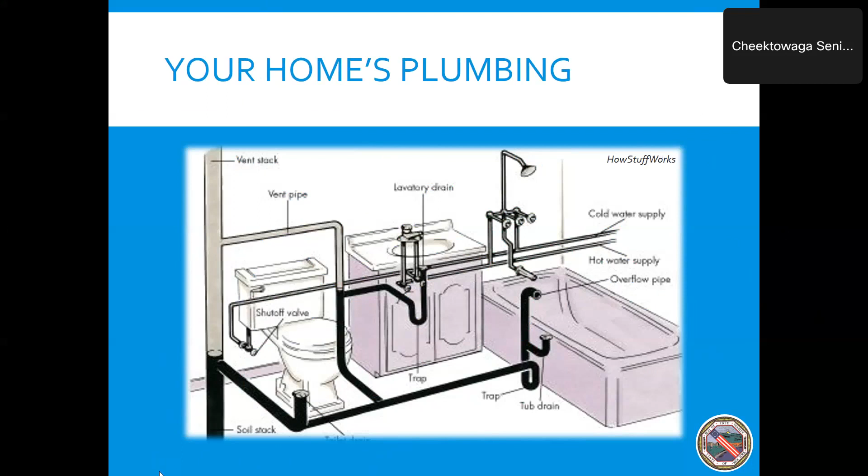So it comes on down, and it flows by gravity. And what I mean by gravity is if you take this table and put a marble on it, and it's flat, it's just going to stay in that one place, right? If you tilt it just slightly up, it starts rolling down the table, right? In a similar way, we have our pipes. They're sloped slightly downward, and what that does then, it allows the flow to go by gravity. So that's what we talk about, gravity flow.

So you have your indoor plumbing, and that comes down, and then it goes into what's referred to as your house or sewer lateral. Those smaller pipes come into a slightly larger pipe, usually about 4 or 6 inches in diameter.

What about the thing that goes around, that's for rain that comes in? Yeah, so there's 2 separate systems. You have your sanitary system, and then you have your storm system. They're not actually meant to be connected, except in the city of Buffalo, because they have a combined system. So this is just for the sanitary.

So then that private lateral connects to, in this area, a public sewer system. In some rural areas, they might have a septic tank instead. The lateral in most municipalities is not owned by the public, so Erie County doesn't own those laterals, because it doesn't serve the public, it only services one building. Folks often think it's part of the sewer system, but because it only serves one property, it's actually a private asset.

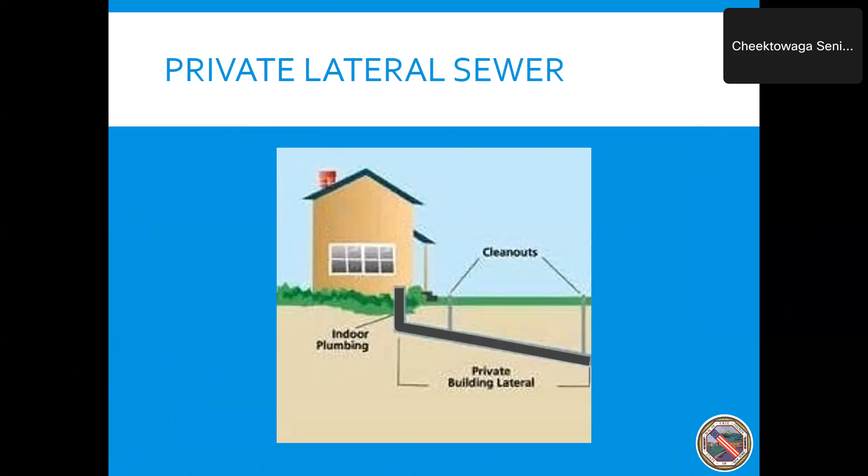So that's in today's world, but I want to take us back, oh gosh, probably like 170 years, 1854 in London. There was an infamous cholera epidemic that had gone throughout the entire city. It smelled terribly, and folks thought it was an airborne disease making people sick. It wasn't until Dr. John Snow meticulously went through the different records and mapped where people were getting sick, and then looked into where they were actually getting their drinking water from, that they figured out it was actually their water that was making them sick, not the air and stench going on around them.

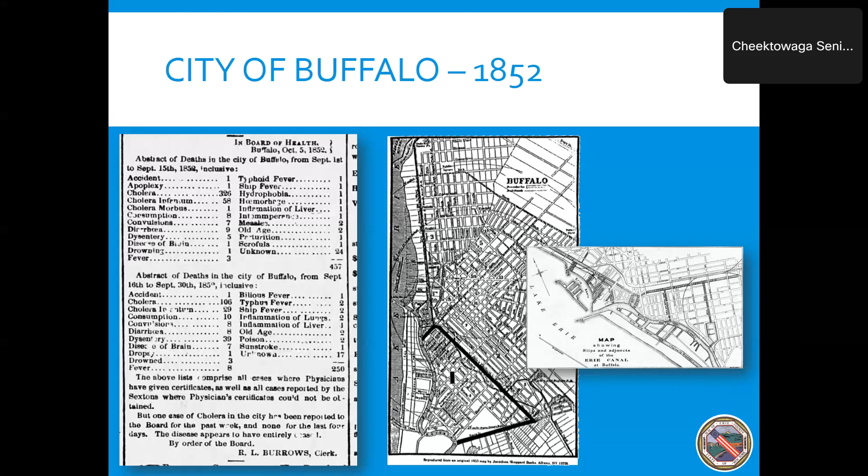Getting back to the private lateral, with advances in understanding the disease in the 1800s, they figured out that contaminated water from people's wastes was causing the drinking water to make people sick, so those wastes needed to be redirected away. Folks said, instead of getting them near where we draw our well water, let's put it into the river or stream, get it away from us. The common refrain was, dilution would be the solution to pollution. Let's get it out of there.

So oftentimes in the early days of sewers, that's exactly what happened. All the home laterals connected to a pipe, which went to a larger pipe, and then they just put it into the creek, the river, or the stream. As long as it wasn't near one of the drinking water sources, it was actually semi-effective. People stopped getting as sick because they weren't drawing contaminated water directly from a well right next to where they were putting their wastes.

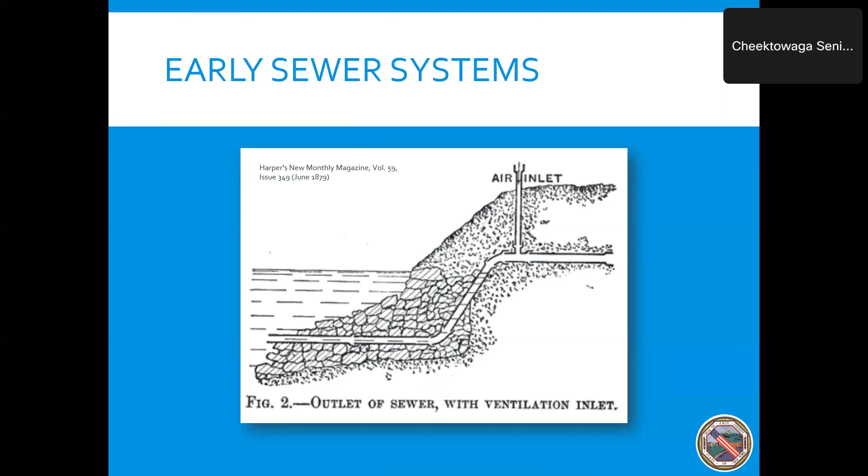But that solution of dilution is a catchy rhyme, it only could go so far. As populations started to grow, those wastes, while they may dilute at a certain concentration, as more and more people connected in and put it into the waterways, that created its own problems. To the point where, as populations grew, we were having all sorts of problems again, and waterborne disease was springing up.

To the point where, in the early 1900s, I think it was in Niagara Falls, which had the highest concentration, or the highest death toll for typhoid fever in the world. Think about it, that was last century. Like Niagara Falls, this wasn't a third world country. This was right down the river from us.

And the principal cause pointed to was the City of Buffalo. The city of Buffalo at the time was a top 10 population city, and you had so much waste going into the Niagara River, thinking it was going to be diluted, but meanwhile you were making people sick downstream in Niagara Falls.

So actually, the United States government and the Canadian government got together and put together an International Joint Commission to address this, because problems on the United States side were causing problems in Niagara Falls, Canada, and problems in Canada could cause problems in the United States. So we have these shared waters, we need to protect them. This body is still here today, looking at different issues that happen with water quality in the Great Lakes region.

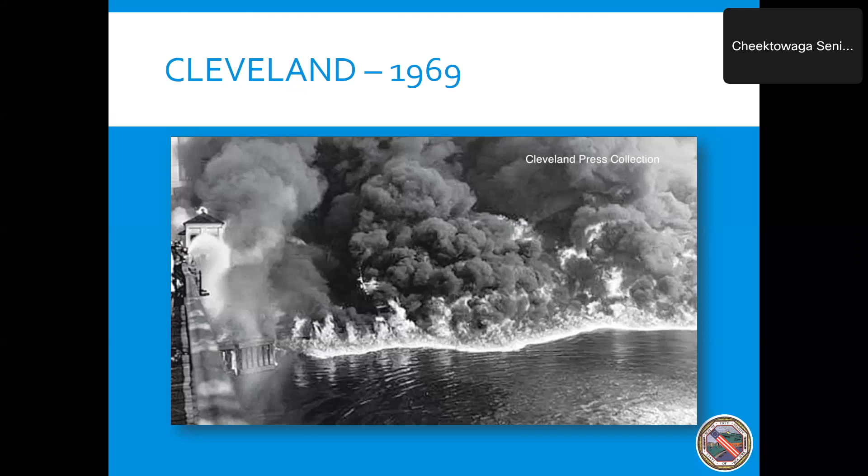The Cuyahoga River was not the only water body to catch on fire. Although less publicized, in 1968 the Buffalo River had lit on fire. It wasn't some brazen act of vandalism—a worker was on a bridge rehabilitation project with a torch, and a spark came off the torch, hit the water, and it started on fire. Think about that—there was so much waste on the river that someone performing maintenance caused it to ignite. That same year, the Federal Water Pollution Control Administration described the Buffalo River as a repulsive holding basin for industrial and municipal wastes that was devoid of oxygen and almost sterile. Essentially, no fish could live in there whatsoever.

That reputation became more publicized a few years earlier when President Johnson visited Buffalo. At that meeting, someone brought in a bucket of sediment from the bottom of the Buffalo River and stirred it with a big ladle, and Lady Bird Johnson recoiled at the smell of it. LBJ basically said, 'Don't worry, I'm going to take care of it'—as soon as he smelled it, he said, 'I can't let this happen anymore.' That same year, Senator Bobby Kennedy, whose son is in the news quite a bit right now, toured the Buffalo River and was quoted as saying, 'This is as bad as anything I've seen.' People talk about the Cuyahoga River, but we had the Buffalo River right in our backyard in basically the same shape.

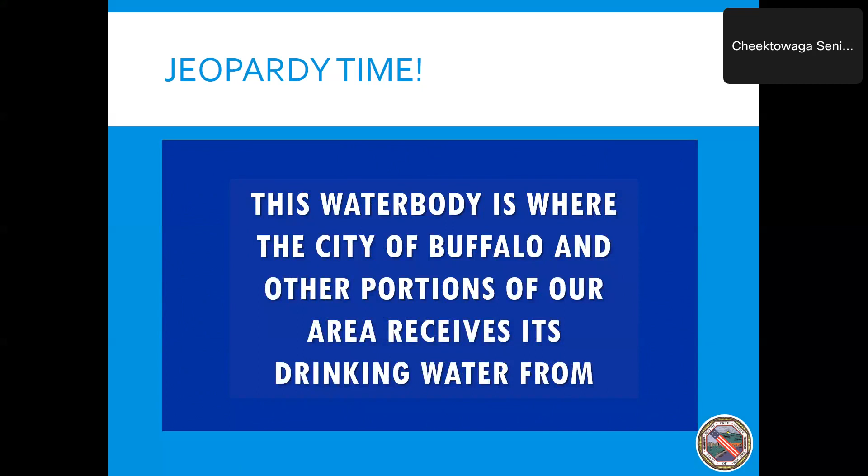All right, let's go 600. This water body was so important to business and commerce that major canals in the United States and Canada were connected to it. Again, Lake Erie, that's right.

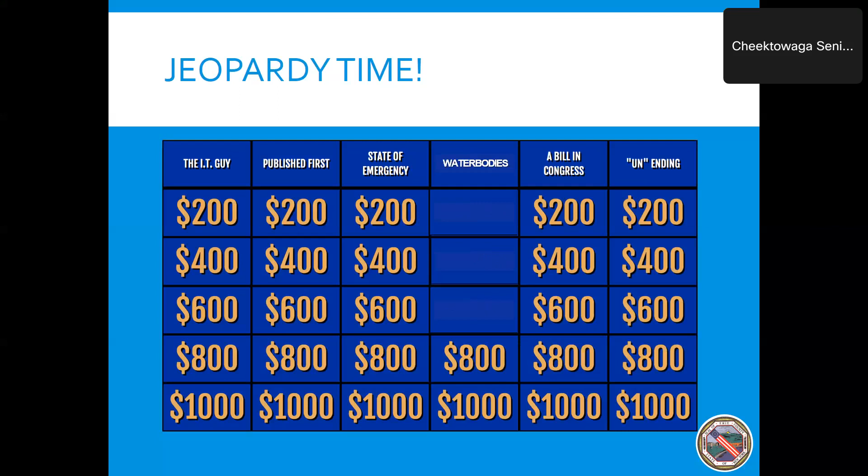Evangola and Woodlawn Beach State Parks are located on this water body. Lake Erie. All right, I think we're starting to see a pattern, right?

Lastly, Chris Hoover of Fishing League Worldwide stated this water body was the number one smallmouth bass fishery destination in the United States. Lake Erie. Very good.

I don't know who Chris Hoover is, but even if you don't, it's all Lake Erie, right? Our county's named after it. It's our drinking source. It's critical to commerce and economic development. It's used for beaches and recreation. It's a world-class fishery. It's amazing that in the 1960s and before, we allowed this tremendous asset to deteriorate to such a sad shape.

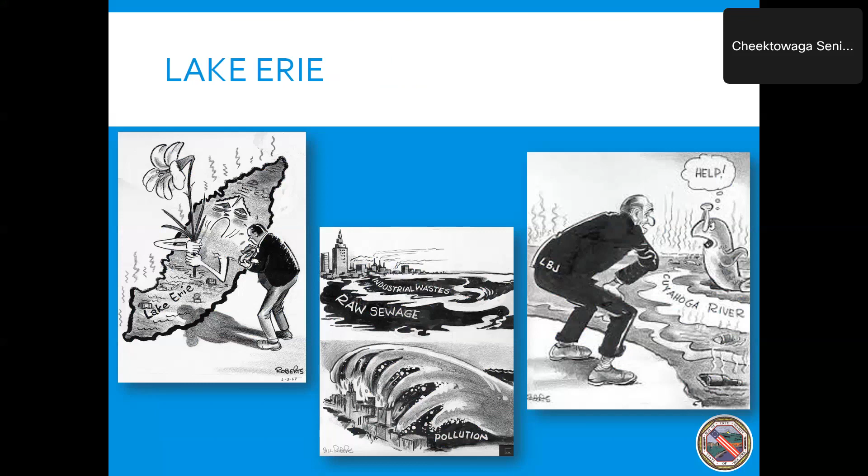By the mid-1960s, with LBJ, momentum was really swinging to address these problems. The decisive action LBJ referred to was actually the passage of the Clean Water Act, which happened right after LBJ left office—actually during Richard Nixon's time, in 1972, it was passed. Quoting directly from the Clean Water Act: its purpose is to restore and maintain the chemical, physical, and biological integrity of the nation's waters.

And what came with that were regulations and funding. Those were the two things that ended up really leading to a lot of the positive changes. The Clean Water Act specifically noted that it would provide financial assistance to construct publicly owned treatment works, or POTWs. A more common term for these facilities—whether newly built or upgraded existing ones—is wastewater treatment plants.

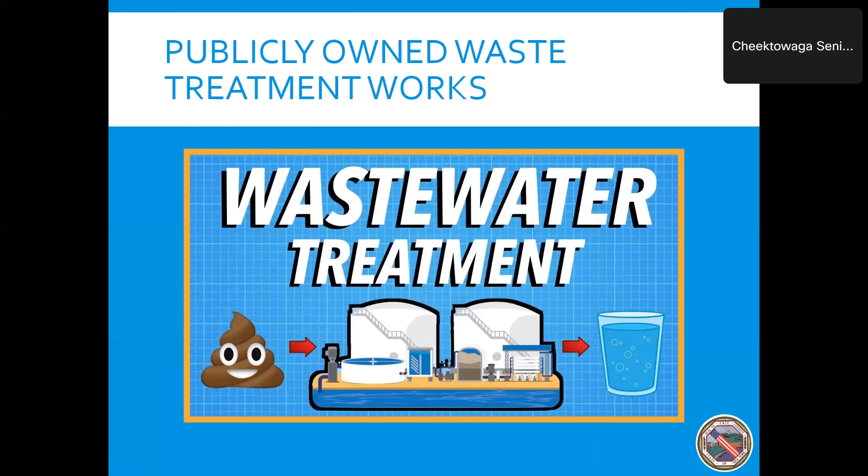So wastewater treatment plants are pollutant discharge elimination systems—they eliminate pollutants, that's what they are. The New York State Department of Environmental Conservation, or DEC, issues permits to these facilities. These permits include limitations the facility must meet, and DEC determines those limitations based on what the water body is used for.

Just one example: some of the limitations include things like pH. You don't want water going into a river or stream that's too acidic, so they require sampling and monitoring to make sure the pH of the water is between 6 and 9. That's typically what's done there.

Another term here is biochemical oxygen demand. If you're discharging water into a water body that demands a lot of oxygen—meaning it needs a lot of oxygen to replenish itself—you're taking that oxygen out of the water body, and the fish and wildlife don't have it available to them. So there are limitations on that to make sure it's protected.

Phosphorus is a key item. Phosphorus actually led to a lot of the algal blooms that caused problems in Lake Erie. So almost all the wastewater treatment plants in our area have a limitation on phosphorus to make sure that doesn't happen. Fecal coliform is another—you can't have bacteria that make people sick. These are all things DEC determines to make sure it's protective of the water body.

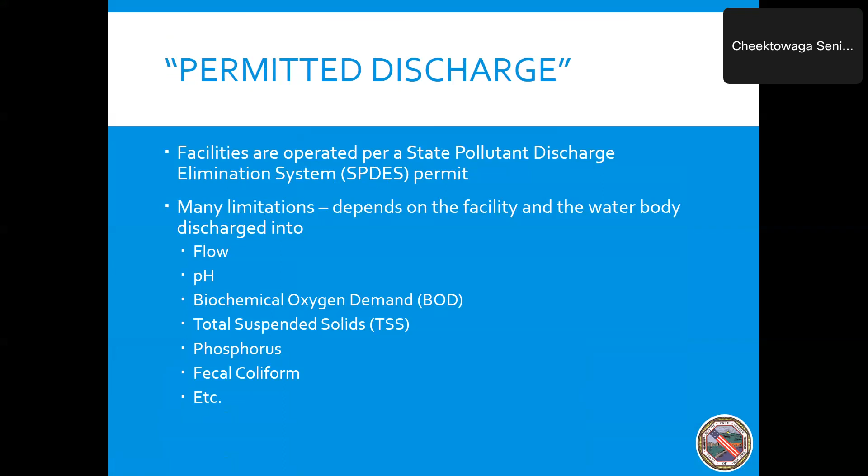I have a question—yeah, of course. You were just showing a picture of some big tanks and said wastewater treatment plants. How many of those are there around the area? I want to say that in Erie County there are 24 wastewater treatment plants. Most of those are actually very, very small. There's probably about 10 that are very large, servicing large areas.

And does this stuff go from there to yet another area? I don't understand. Actually, we're going to go through that. So, because I live in Elma, I have a septic system. The guy comes in a truck and takes it all away. Does he go to one of those treatment plants?

He'll go to one of those wastewater treatment plants and offload the septic waste into the treatment plant so that it can be cleaned up, and so it's not causing any sort of environmental problems.

Are they all on the water? Almost all of them are. Again, everything flows by gravity, right? So do our rivers and streams, so our low points are often near waterways. To make it economical, a lot of facilities are built on water. I mentioned the Bird Island treatment plant for Buffalo Sewer Authority, right on the Niagara River. If anyone's been to Woodlawn Beach State Park, near Route 5 and 179 in Hamburg, directly south of there is the Southtowns treatment plant—again, right on the waterway, because everything flows by gravity in the pipes toward that location. Great question.

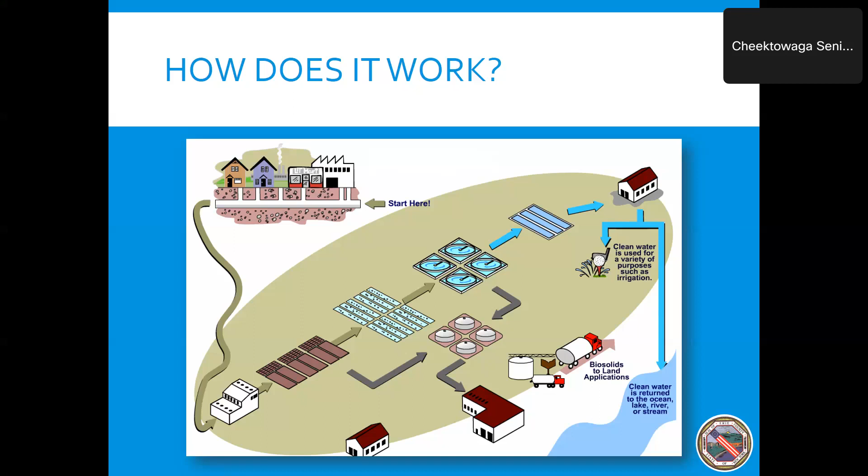First, you've got to know what you're actually treating. So what's in sewage? Well, here's a partial list.

Primarily, there's water—most of it's water. That's actually what we're recovering from that. Water is a finite resource. We have the same water that was around when the dinosaurs were around; it just cycles through. It evaporates, precipitates, goes through the oceans, and goes in a huge cycle. So what we're doing is taking a pollutant and recovering a key resource out of it—we're providing clean water.

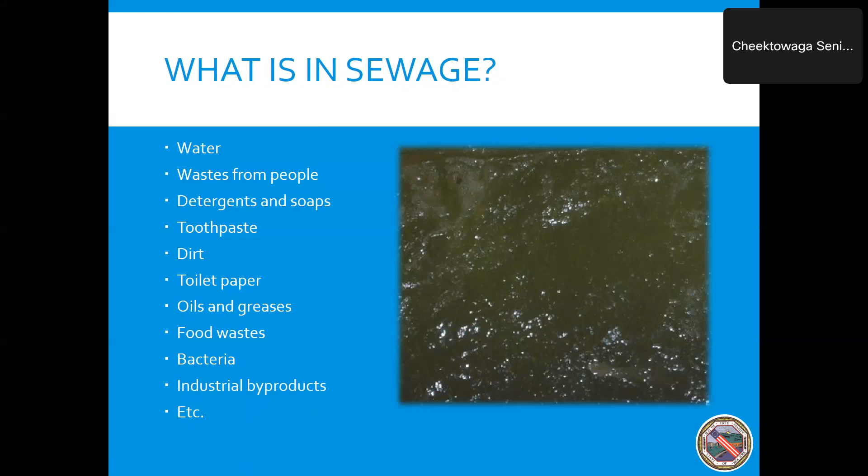Really incredibly important. It's the other stuff—the waste from people, detergents, toothpaste, dirt, toilet paper, bacteria, et cetera—that can potentially harm our waterways, and that's what's removed or eliminated through the wastewater treatment process. By volume, industrial byproducts would be higher.

So it depends on the area. There are some places, for example in the city of Buffalo, with concentrations of a lot more industries. Out here in Cheektowaga, there's some industry, but mostly it's residential. So it depends—also if there's a specific industry with a really high-strength waste, sometimes they'll actually have to do some pre-treatment before they can discharge, because it may end up causing problems. Great question.

Any other questions? Does Cheektowaga have their own water sewer system?

The northern portions of Cheektowaga have a sewer system owned by the town itself. The southern portion is part of a county sewer district. There are a lot of different reasons for that. If you go back into history, there used to be a lot of small underperforming treatment plants dotted throughout our county. When the Clean Water Act was passed, municipalities had to decide: do I upgrade this existing facility and run it into perpetuity, or eliminate it and send flow to the Buffalo Sewer Authority? So a lot of those small treatment plants, run by the town or sometimes the county, were eliminated and sent to the Buffalo Sewer Authority. But you still had all the sewers upstream that had to be managed too—that's why the town owns a portion and the county owns a portion in the southern part.

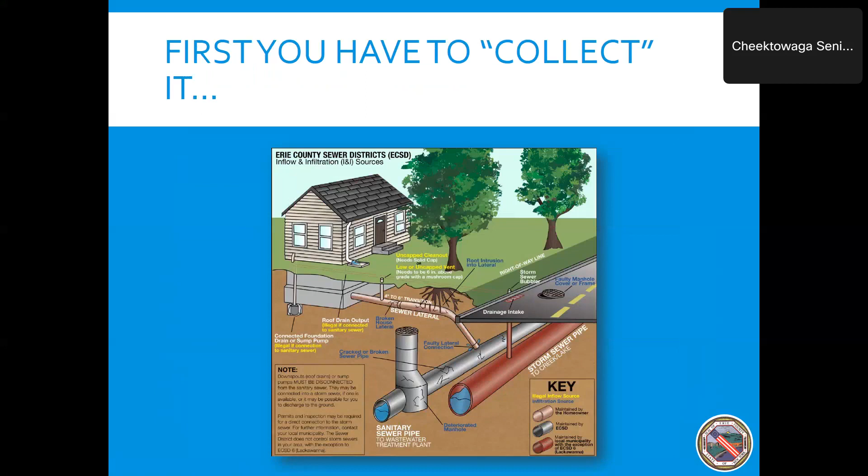They're not together. In the city of Buffalo, they are, because that's the way the system was designed in the 1800s and 1900s. They've been actually working to disconnect portions of it. But out here, they are separate.

So what I'm going to show you is actually some video footage from some televising work that we've done in sewer systems. Yes, we put cameras down sewers. In fact, this camera, probably we had to replace it today, is about $150,000. It's very expensive. It actually goes on like tank treads, about this long. You insert it in, and then you can pan. Well, I'll take you through some of the video so you can see it.

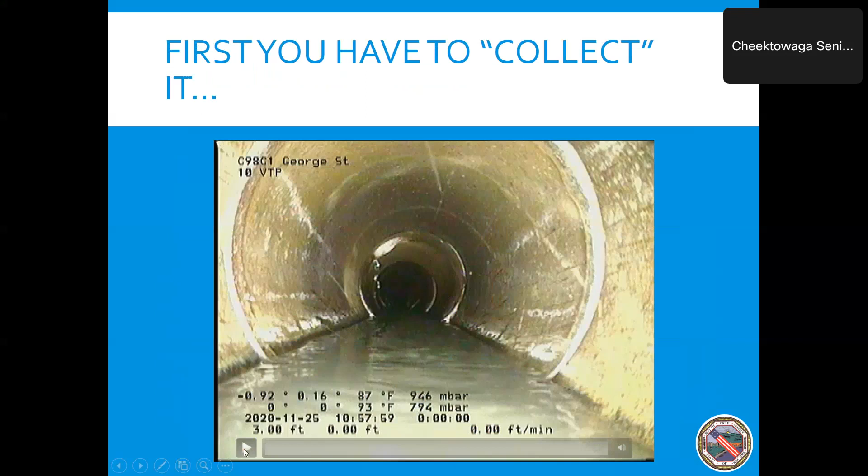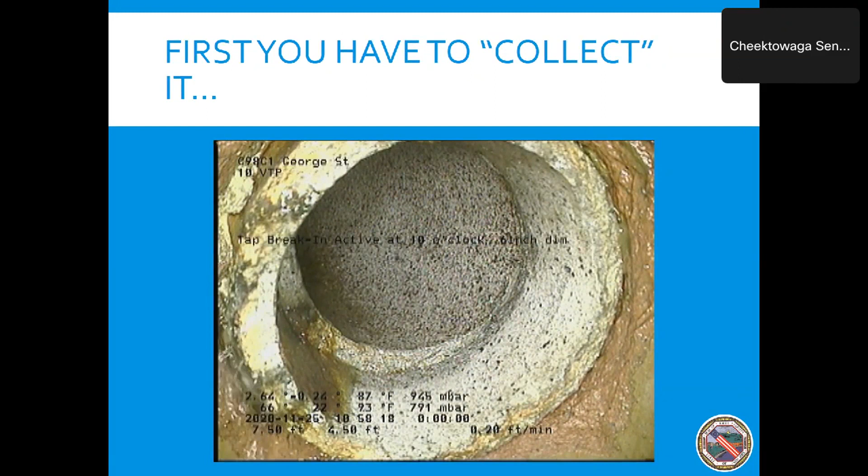So there's nothing special about this particular sewer, I just have to show it. So you can see here, this is one of those private laterals connected into there. So what our camera operator is doing is just kind of observing to see if there's any sort of defects or anything like that. So you can see that's a break-in tap. It's active. We're going through here.

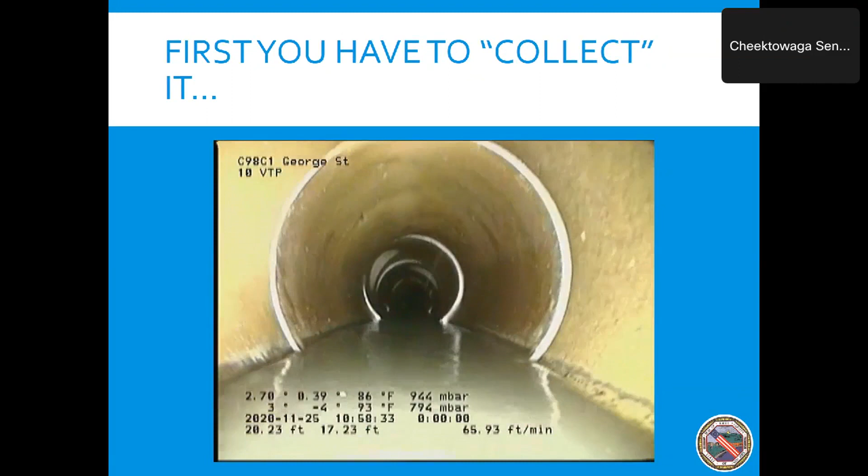This is a type of pipe called clay tile pipe. It's an older material that's no longer used. It comes in 3-foot sections, so you can see there's some roots. Because you have 3-foot sections, you have a lot of joints. Where you have joints, you have potential where roots can come in, or you can have water coming in.

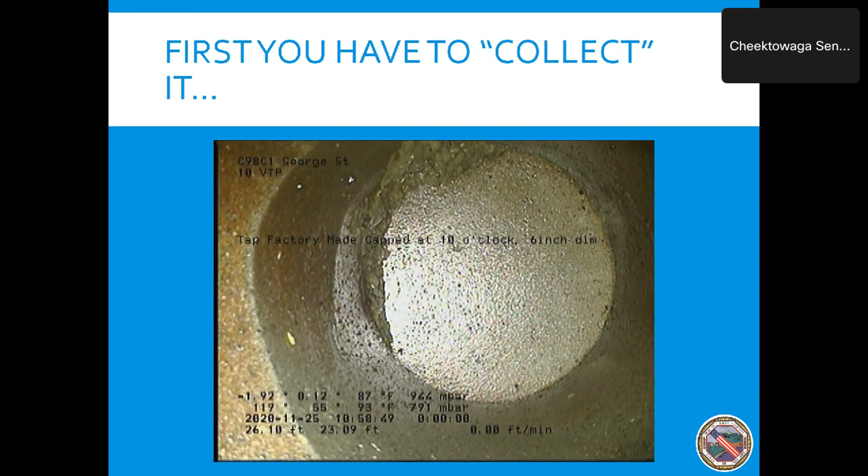What do they use nowadays? Primarily PVC, plastic pipe. You've probably seen it in about 13-foot sections, usually. Is that the green, black ones, the big black ones? No, they're usually a greenish color. There are other materials, but that's primarily what's used is plastic PVC.

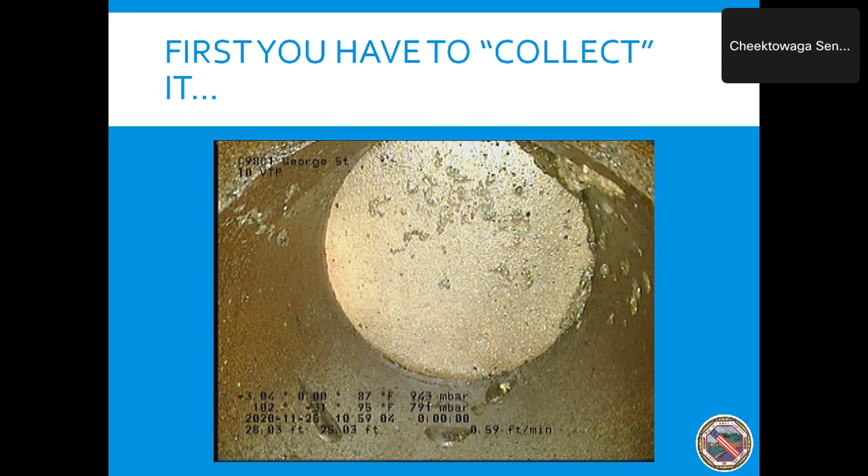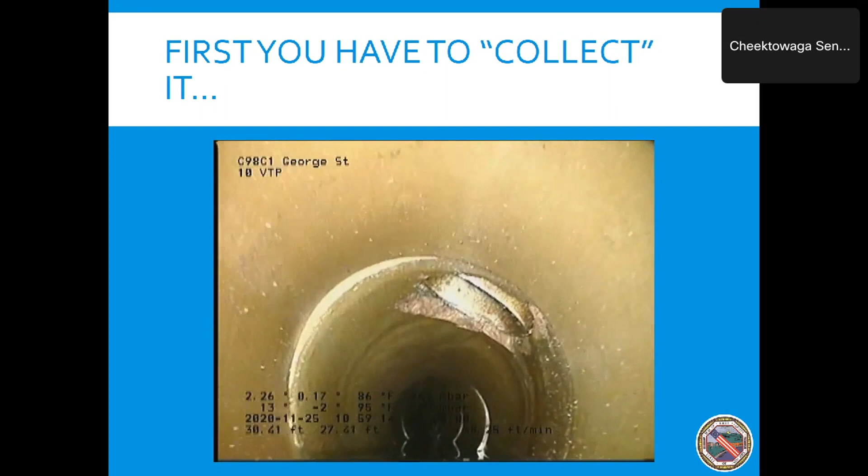So you can see our camera operator sees there's a cap tap. Sometimes if it's not capped but it's inactive, that's a place where groundwater could come in, so we're going to want to cap that to make sure that groundwater is not coming in. So those holes that you're showing up on top is where the water's coming from? So here is one that's active. So yes, that's one of those private laterals.

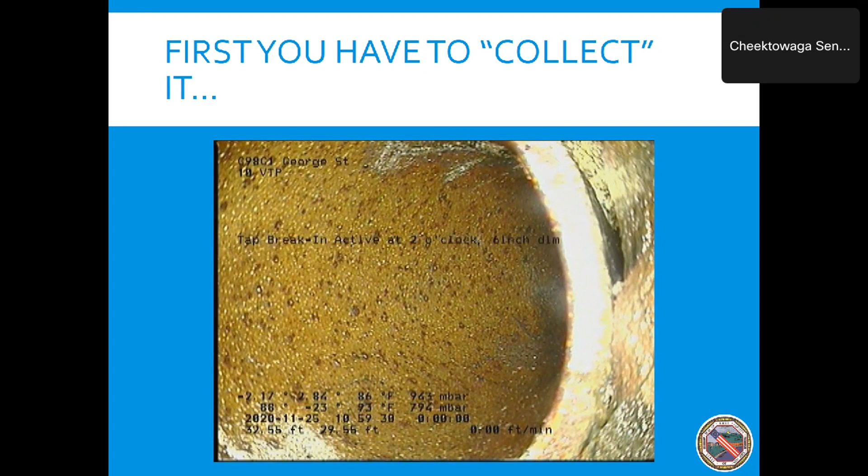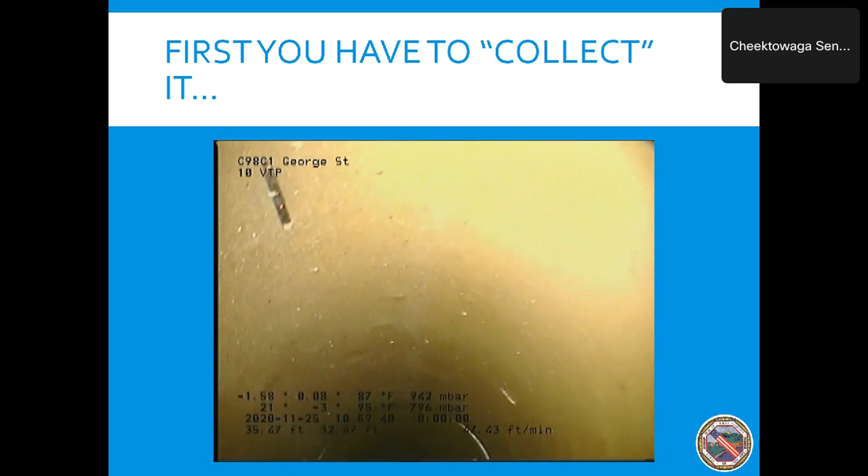So why this is useful is we have to make sure that we maintain these sewer systems into the future. And the only way you can get any sort of view of what's happening is by bringing that camera in and trying to determine if there's any sort of defects. Sometimes you'll see that there's cracks or it's actually starting to collapse. You want to address that before it's a full collapse, because then we potentially could back up someone's basement or have those type of problems.

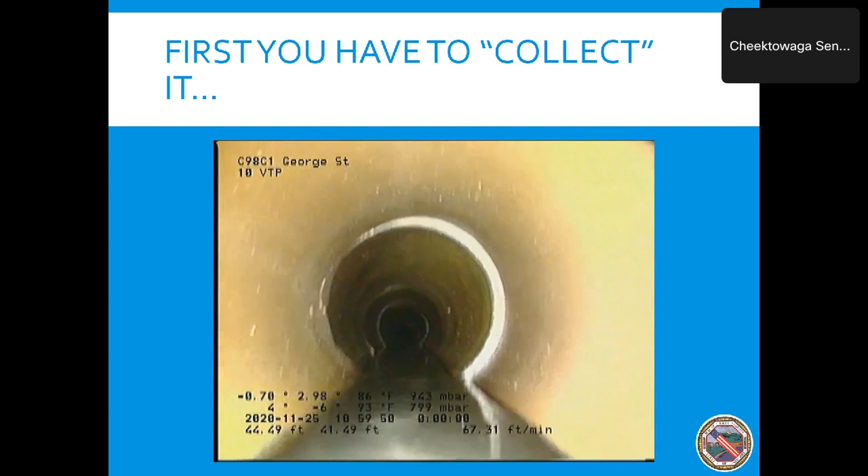So we've talked a lot about gravity flow, and although that's our goal, there are times when you get to a river, stream, or there's some sort of obstruction where you can't make it by gravity any longer. So what we do is we also have a series of pumping stations. Think about when you go to the gas station, you go to the gas pump. What you have is in the ground, a large tank that has all the gasoline in it. And then you have a mechanical device that takes that gasoline from a lower level and brings it up to a higher level.

What we do with our pumping stations is we have a big tank in the ground that holds sewage in it. We have a series of pumps that are there. And then instead of a short distance from the tank to your car, we'll have it in a longer pipeline to take it to a high point, say at the top of a hill, and then we'll have it go into another gravity sewer. Does that all kind of make sense?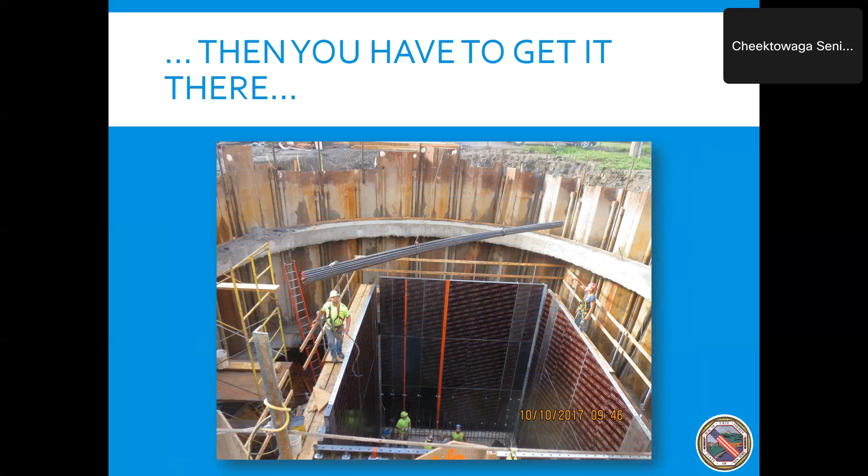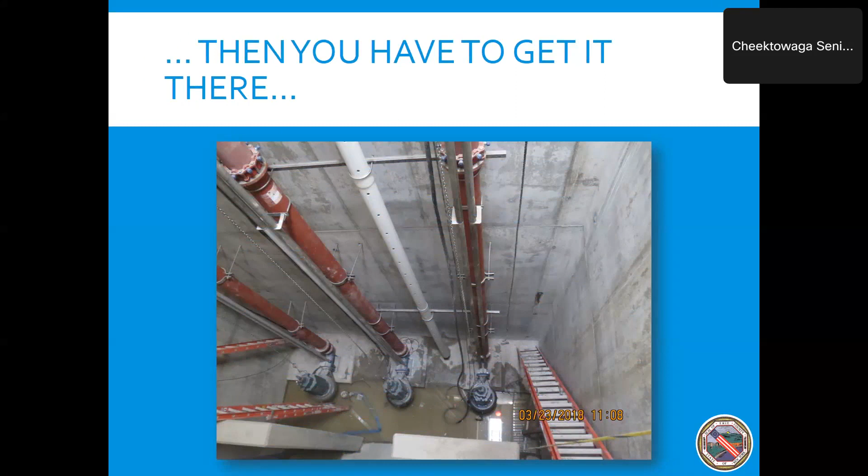Let me show another view of it. So this is after that hole was filled in and they started to form the concrete walls. You can see there's 3 pumps down there at the bottom. Here's another view of the pumps themselves.

Just to give you a sense of this, the peak flow from this pumping station is 4.6 million gallons per day, or roughly 3,200 gallons per minute. To put that in perspective, this station could empty a Olympic-sized swimming pool in less than 3.5 hours. So that's a lot of sewage, right?

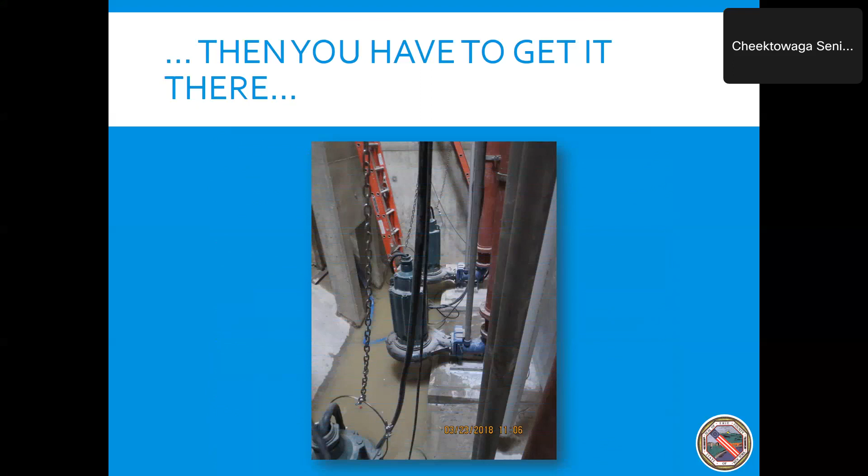Just a few other points. I mentioned that antenna in the photo - we have to monitor this pumping station 24/7, so we actually have radio telemetry. Unlike our treatment plants, we don't have staff there around the clock. So if there's any sort of alarm, a pump fails or something, we get immediate notification and can send maintenance staff out there to maintain it.

We installed 3 pumps in there. We only actually need 2 to convey the peak flows, but if we ever have a pump down, we can still make sure that we're maintaining service.

How big are those pumps? That one's probably about this big. So really good size. I forget the size of the pipe coming out of there, but it's a pretty good size.

I think this project, all told, was about $3 million. That was a few years ago. I'm guessing with inflation, you're probably talking $5 million by the time it's all said and done. That's one of 100 pumping stations that the county maintains throughout the entire area.

Where is it pumping the water from? Does all this sewage come in underneath? Yeah, so it flows by gravity into that wet well, that tank underneath the ground. This happens to be called the Boston Valley Pumping Station, so it's in a kind of valley area, and then it pumps it up the hill into the village of Hamburg, because the village of Hamburg is at a higher elevation. Then it flows by gravity from the village of Hamburg all the way to our Southtowns treatment plant, and then on to Lake Erie. The pumps are like sitting on top of this big bowl of water to pump it out.

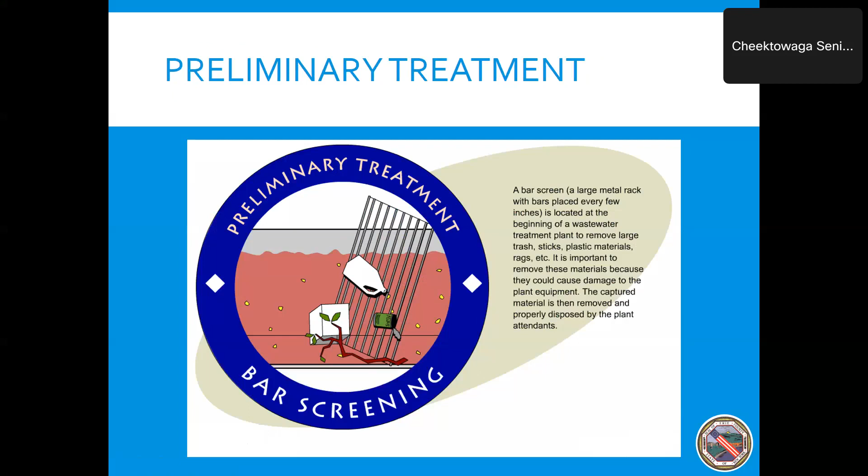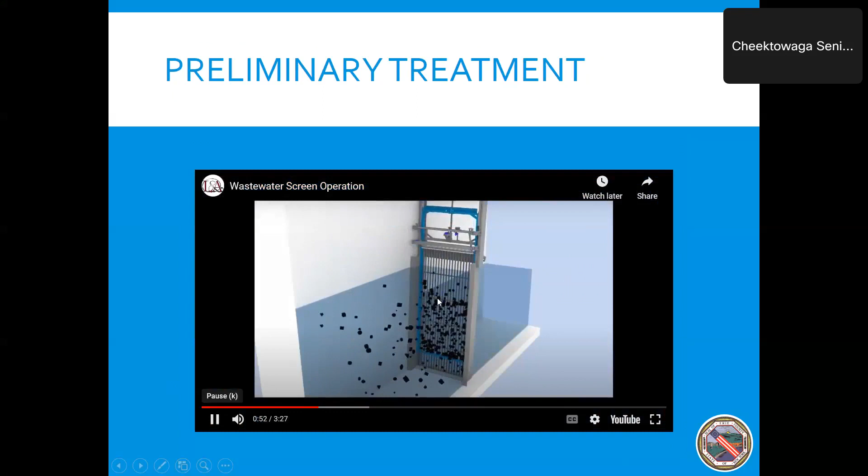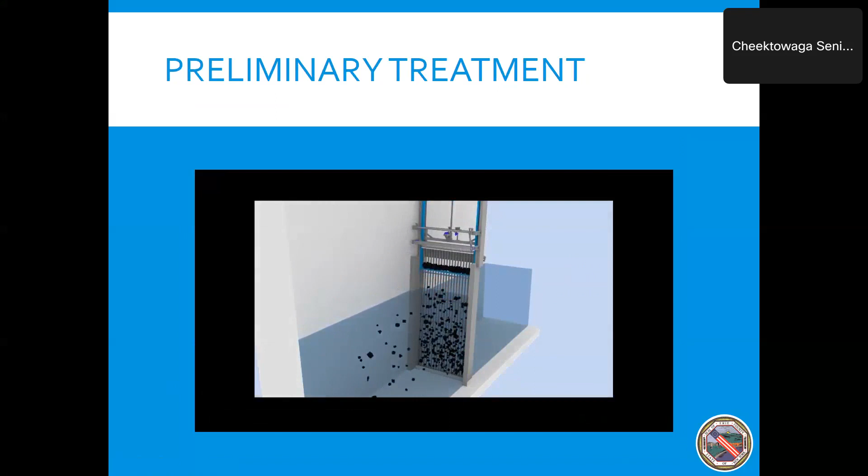Hopefully this video works. Okay, so this is a type of screen called a bar screen. Essentially what you have is metal bars going through it, and debris gets caught up on it. If too much debris gets caught up, the flow can't make its way through. So you have a rake that comes through and scoops up that debris, moves it off, and then that goes off for further disposal.

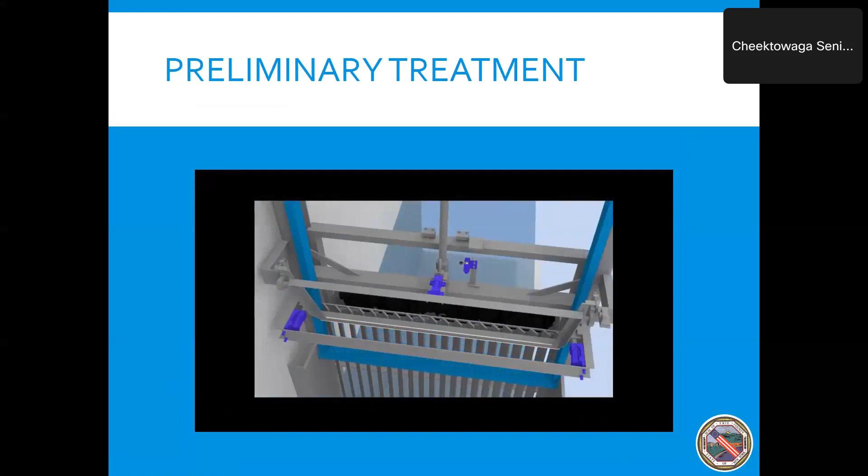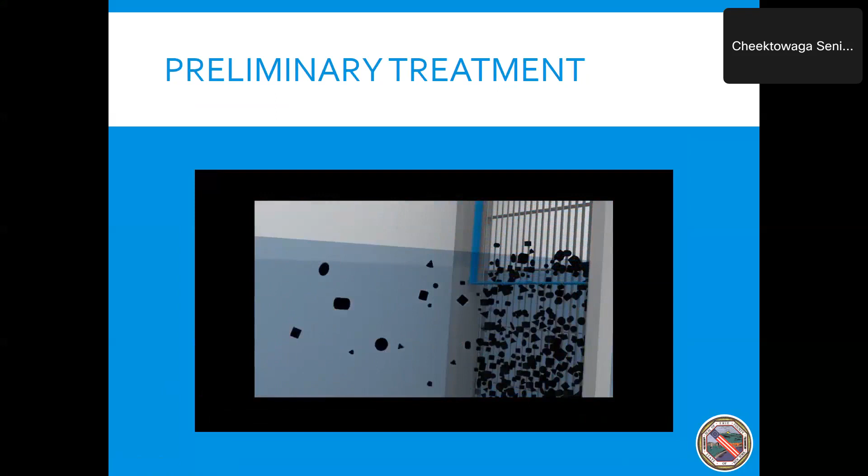How big is that? Depends on the treatment plant. We're putting in new screens at our Southtowns facility, the one right near Woodlawn Beach. They're like 27 feet long and about 5 feet wide, and we have 3 of them. Almost 3 stories tall, really huge equipment.

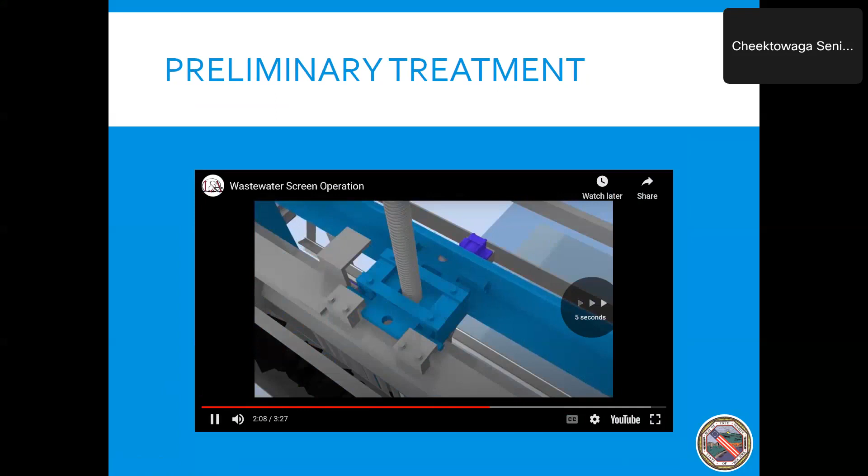If that's just for wastewater, how does stuff like bleach bottles or water bottles get in there? Yeah, so people will pop manhole covers and throw things down there because they think it's funny. But if you put something too big down there, it can clog the sewer and we have to remove it. Meanwhile, you're potentially causing an overflow, backing up people's basements. It's real trouble.

I'll give you an example. Does anyone know what that is? It's a bowling ball. We recovered a bowling ball from our sewer a couple of years ago. We had a backup on a street and were trying to figure out what was going on, so we sent our camera unit down there and it looked like there was some sort of obstruction. We have equipment on a flusher truck called a root cutter that comes through and cuts through. You can see there's a little indentation there, that's where the root cutter caught it and moved it just far enough down where we could recover it at the other end of the manhole.

We've had arborvitaes put down. What's that? Bushes, like those bushes, the trees. Propane cylinders people have put in there too. I would find another hobby, but whatever.

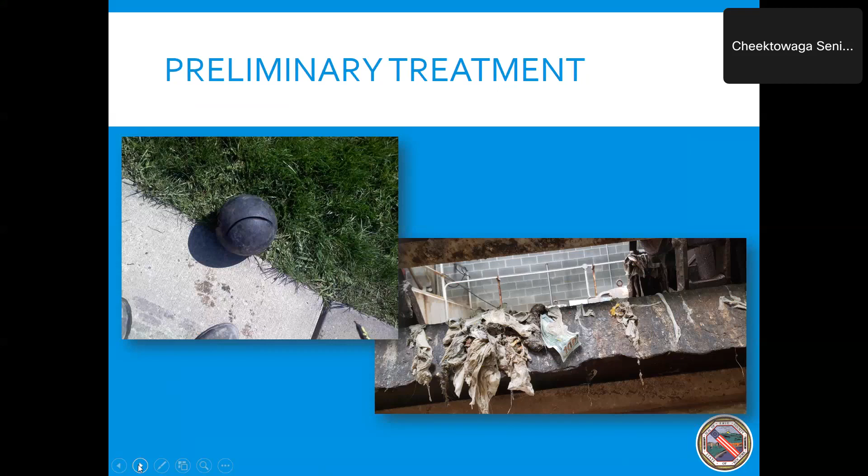Anyone see what that is there? It's a $100 bill. One day our operators are going by and say, I don't believe this, a $100 bill. So they disinfected it and bought pizza for the folks at the plant. I don't think anyone's going to be recovering that. Why someone would put a $100 bill down the drain, I have no clue. I've heard wipes have been an issue too. Yes, I'll get into that, remind me if I don't, because I have a picture of what can happen with the wipes.

After preliminary treatment, the next stage of the process is referred to as primary treatment. There are two main functions for primary treatment. First, you have the solids that settle to the bottom, and you have a lot of solids in sewage. But then you also have the oils and greases, because our skin is oily, and you have little bits of oil that might be on your dishes after you wash them. Those are things we don't want making their way into the water as well.

So at the bottom, those settled solids are called sludge. And the oils, greases and fats that rose to the top are called scum. We've got great terminology in wastewater, right? But that's what we do — we try to separate those solids and floatables out so we can have clean water go on to the next step.

And you have different treatments to get these different results. Yeah, absolutely. So this is an example of what's referred to as a clarifier. Actually, I think I have a picture. So you look at this and it's like, all right, it's kind of a tank in the ground. It doesn't look like much, right?

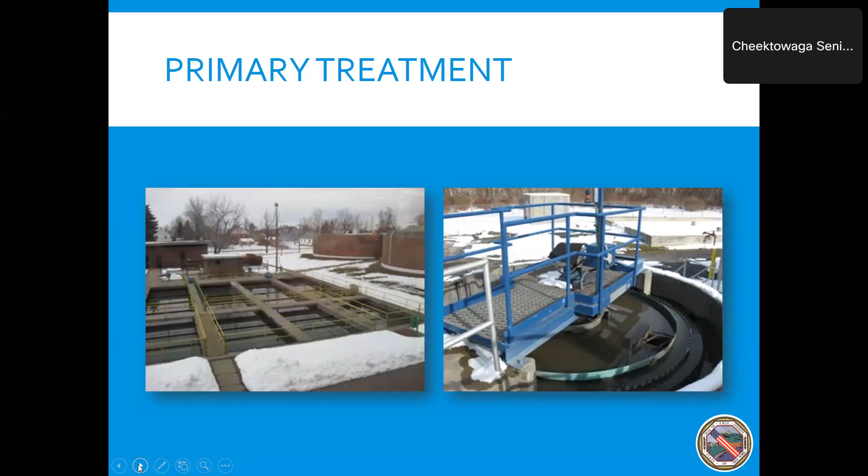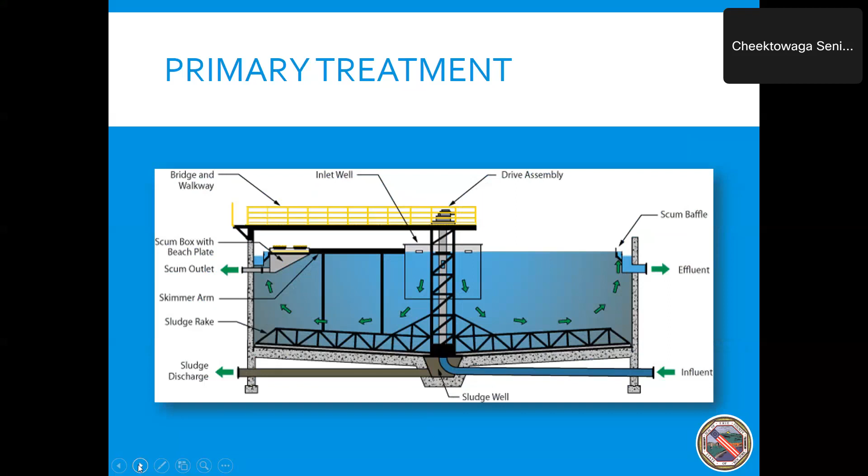But there's actually a lot that goes into what engineers do — a lot of design and thought process that goes into how these things function. What ends up happening is wastewater comes up in the center, and then it flows towards the outside. That allows the solids to settle to the bottom. You have oils and greases that float to the top, and then skimming equipment brings those things together to try to separate them out from the cleaner water. I've got a video a little later that shows some of that.

So before the Clean Water Act, we talked about with the Buffalo Sewer Authority — basically all it was, was a primary settling tank, and then disinfection, and that was it. But when the Clean Water Act was passed, that was really the advent of what's referred to as secondary treatment standards. Those are the additional steps brought forth to make sure we're properly protecting the environment.

I kind of talk about how, when it comes to a wastewater treatment plant, what we do is we take what happens in nature and we speed it up. If you think about it, we have all sorts of animals in nature going to the bathroom and creating waste. And what happens is microorganisms break down those wastes over the course of time, and you don't even know they're there — they actually end up becoming fertilizer, and everything goes along with that.

We can't do that with the high concentration we have from all the humans and everything. We can't just put it out into the environment, because we saw what happened in the past. That's why we have treatment plants — we basically speed up that process.

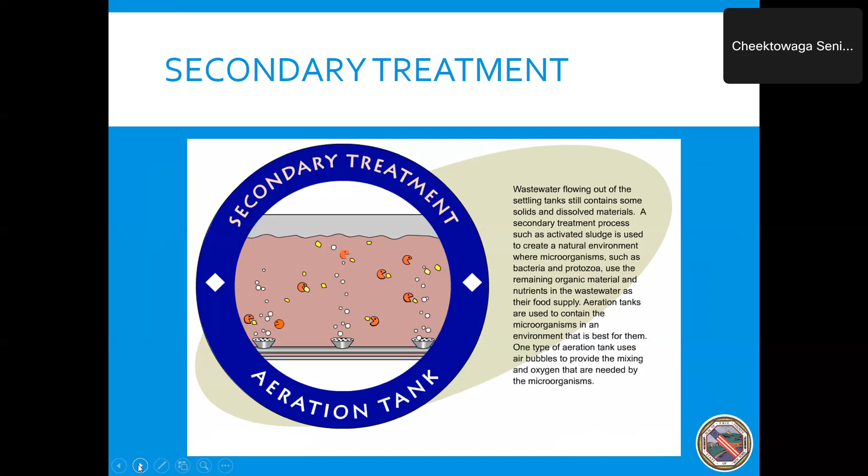So let me just show — I have a couple examples here. The following two videos are from a microscope using 1,000 times magnification. We actually have a certified laboratory that can run all the different tests to make sure our treatment plants are running properly. So this is raw sewage — you can kind of see those little microorganisms. Again, this is at 1,000 times magnification. They're kind of swimming around in the sewage.

Let me see — in the second video, this is a view of the activated sludge in the treatment process. You can see it's much more highly concentrated, bigger, and things are kind of clumped together.

What that does is basically take what happens in nature and aerate it. We're bringing things together into a higher concentration, and that removes a lot of those wastes — speeding up what happens in nature into this type of process. So we engineer those systems so the microorganisms are doing the job, and we're just utilizing them to our benefit. I've got some other slides.

I know this is kind of an abstract concept — is that secondary treatment the water in the middle, or the sludge on the bottom? Actually, what's part of the process: you take some of that sludge at the bottom, and because it's so highly concentrated with microorganisms and bacteria, you actually recycle it through the process, so you get a higher concentration and do more of that work.

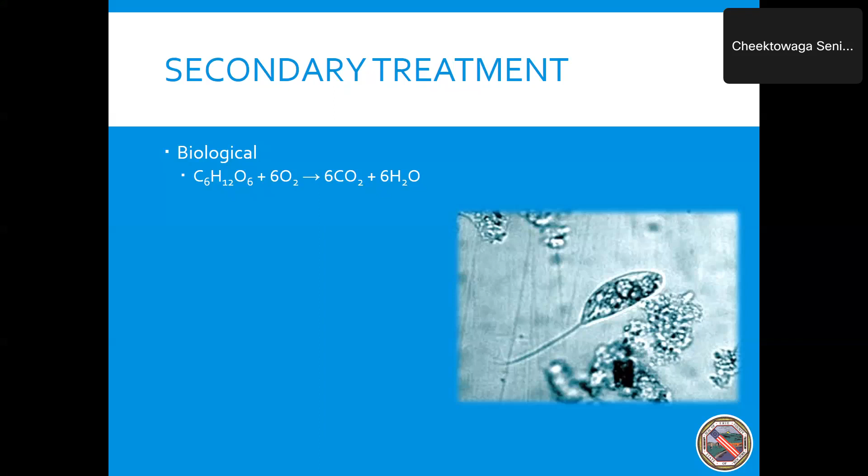So we've been recycling in that sludge, the mixture of sewage and bacteria, and putting it through the treatment plants, doing all that type of work. There's a lot of mixing involved, it's really agitated. But you can't take that and just discharge it into the waterway. So then we have another clarifier, shown before, where you need to settle that out, and also make sure you skim off any oils and greases that may not have made it through that last treatment step.

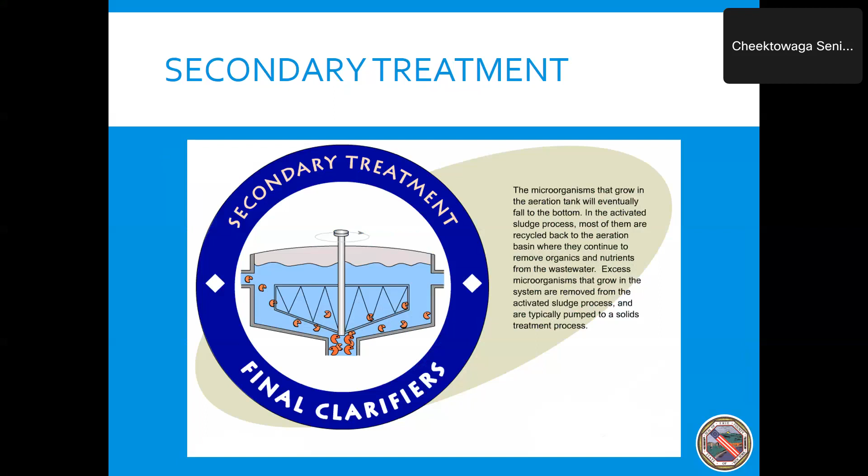And then you can see down here you have all those happy Pac-Men eating the various contaminants in the wastewater. That's where you have some of the solids recycling through, but the cleaner water makes its way onto the next step. This is a video that shows the discharge on a clarifier at one of our treatment plants.

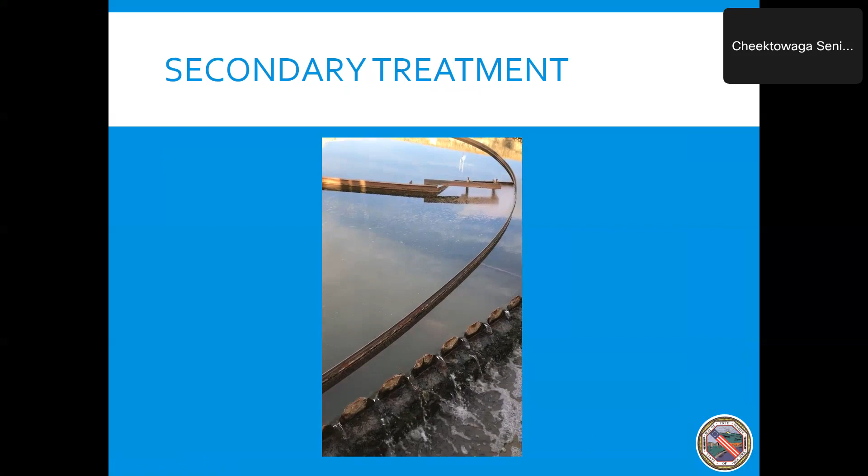So you can see here, this is what's referred to as a baffle. It goes about 2 feet down into the water, and extends a couple inches above it. You can see there's lots of little particles - that's the oils and greases that have floated to the top. They're kept on the inside there, and a scooping arm brings them together. You can see the cleaner water coming out the end, and that goes on to the next step.

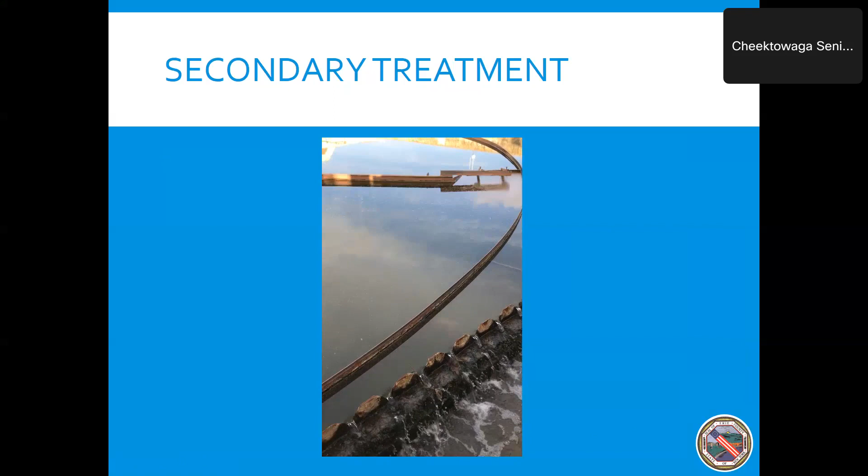Sometimes that's the last step of the process, but other treatment plants may have a third step, called tertiary treatment. Basically, that's like filtration.

I'm not going to get too much into this since it's already 10 o'clock. Basically, it's kind of like a pool filter. Water comes through, might have some small particles and debris, which get caught in the filter media. The clean water goes through, then gets pumped out and goes on from there. If you get too much media in a pool filter, you have to clean the filters - you have a backwash cycle where you go backwards and take water up through there, collecting all that debris. Then we put that at the beginning of the treatment plant, and hopefully it settles out in the clarifiers from there.

So you said that not all of them have this tertiary treatment. Why wouldn't we all want that? Well, because they are very expensive. And some clarifiers can be designed such that this is not a necessary step.

For example, if you have a ton of land area, you can build a huge clarifier and get a lot of settling going on, and you won't have this problem. But if you have a more compact area where you can't build a big enough tank, this is just one example - there's a lot of other reasons why you may or may not need it. You may need that extra filter step just to make sure you get all the solids out of there. Does that make sense?

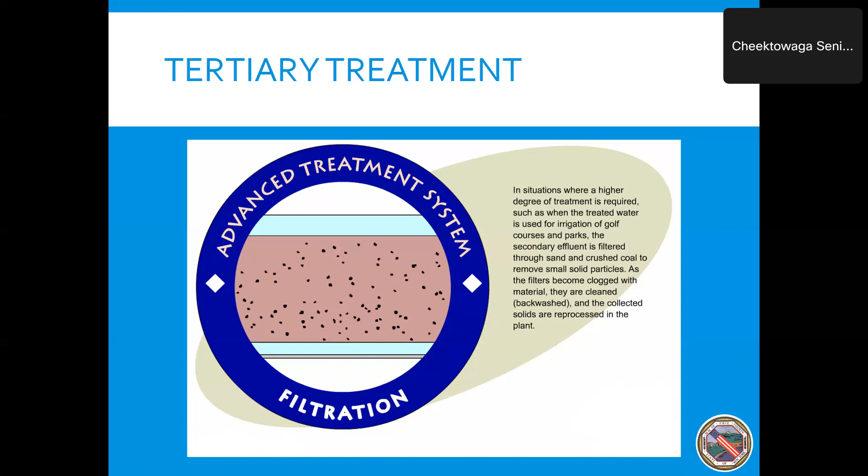My parents had a place on Cattaraugus Street, and our boat used to get the glue from the Cattaraugus Street glue factory. Oh, really? Their boat - so they were discharging that into the water. How long ago was that? About 20 years ago. That probably shouldn't happen, just because if it's anything causing a water quality problem, they really need a permit to be able to do that. I'm not familiar with that.

So we had all that bacteria and we used them to our advantage. We talked about how bacteria make people sick, typhoid fever, cholera, and things like that. So the last step in the treatment process is disinfection - we use those bacteria and say, hey, thanks a lot, now we're going to kill you.

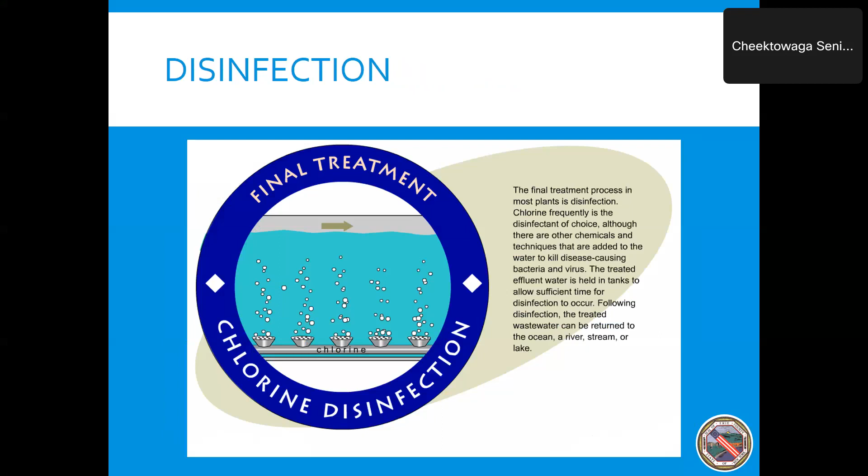A lot of times we talk about chlorination - Buffalo Sewer Authority, that's oftentimes what's used. But also there's UV disinfection. You've probably heard sunlight is the best disinfectant - that was originally meant for corruption, said by Justice Brandeis back in the day. But it turns out sunlight actually is an effective disinfectant. What it does is it doesn't kill the bacteria, it alters its DNA. Like when you get a sunburn that alters your skin and cells, certain wavelengths of UV light end up altering the bacteria's DNA, making it so they can't reproduce. Bacteria have very short lifespans, and if they can't reproduce, the whole colony dies out.

How many of those treatments do they have? Ultraviolet - the county has a total of 6 treatment plants, and 2 of them have UV disinfection. The remainder of them use chlorination. Great question.

Does that make sense? I'm just trying to make sure I understand. So what we're doing is killing off the Pac-Man? Yeah.

After they did their job, new ones are always growing. There are always new ones because the flow never stops at a treatment plant. We always have sewage coming in.

Okay, so in summer, mostly I notice that the water really smells of bleach or chlorine. You know what I'm saying? Why in the summer? The outdoor water, or the water coming in from the tap?

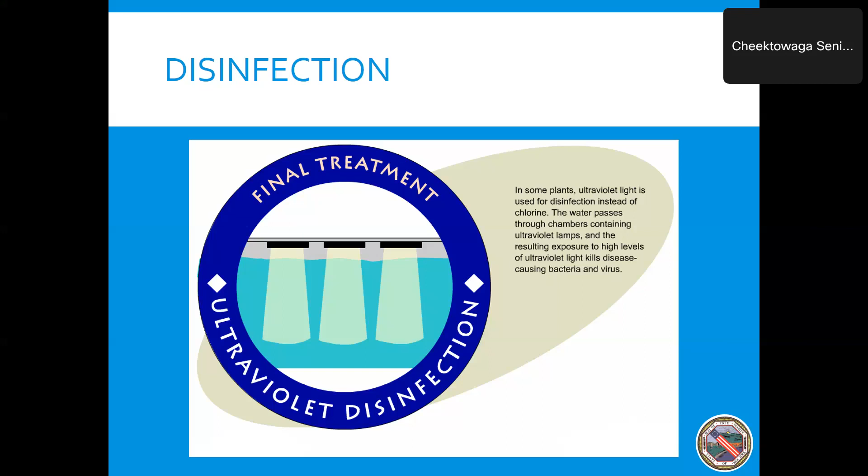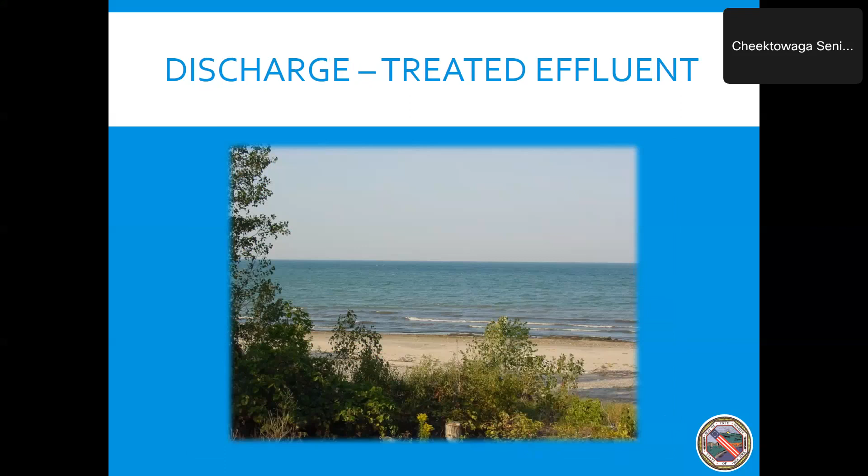So then it's discharged as treated effluent. It's no longer wastewater, it's treated effluent. We've removed those pollutants and we've recovered water, and we're taking that water and putting it back into the waterways. And this is the result—this is what influent sewage looks like, and that's what it looks like coming out. So, pretty marked difference, right?

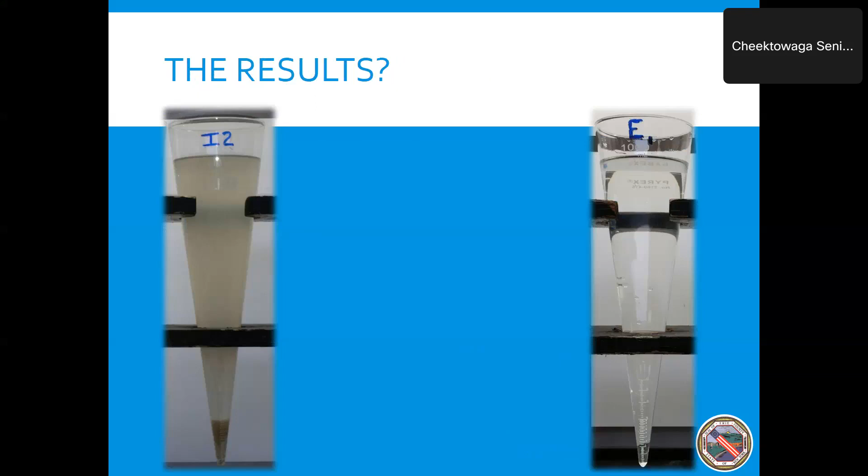Even though it looks clear, and again, you talked about the glucose and the sugar in there, so we know there's a lot of dissolved things. That's why we have our laboratory, because looks aren't everything, right? We have 5 laboratory technicians and 2 laboratory directors looking through all these samples, making sure we report those to New York State DEC to show that we're in compliance.

Do you still check for COVID? We do take samples and send those to the University of Buffalo, and they sample for COVID, as well as TB, flu, everything like that. I don't know all of the diseases, but I know they were looking at RSV, polio, influenza. And what about location, where it came from? Who would know? The county actually has a website I could direct you to.

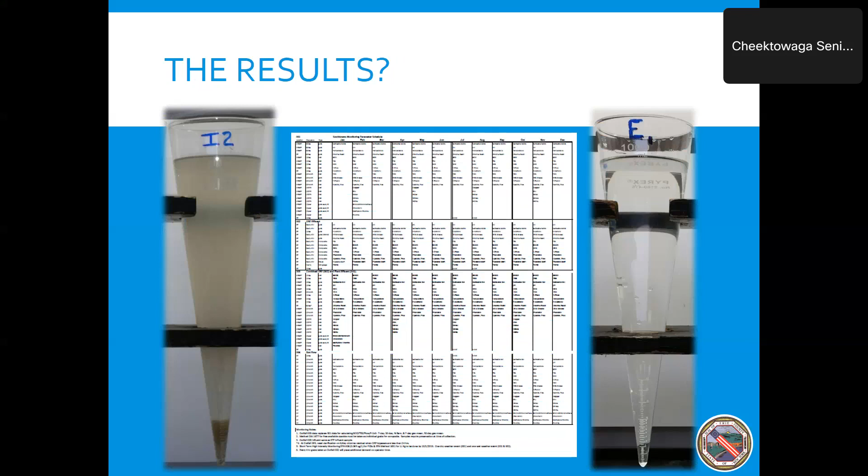So afterwards, remind me, because I've got to make sure I show you where it goes and the map. So I can look that up on my phone when we're done. So, what happens with the solids—I'm gonna go through this really quickly because we're kind of getting up there.

Basically, you have to dispose of the solids at the end. The ones that settle out, we recycle some of them, but eventually you can't recycle them forever, and you have to waste some of those. So basically, what we try to do is get all the water that we can out of it, because we're either going to be land applying, incinerating, composting, or landfilling it. All of that ends up entailing some sort of cost—you haul it away or move it to a different location, and the more water you're moving, the more costly that is. So we really try to get all the water we can out of those solids.

You can actually digest these solids. You put them in what's referred to as an anaerobic digester, and you heat it up between 95 to 100 degrees Fahrenheit, completely without oxygen, very similar to our digestive system. Then it breaks down those solids and produces methane, kind of like how humans produce gas. Then using that methane, burning it, they can either heat their boilers or produce electricity. Is it thermal energy? That's right.

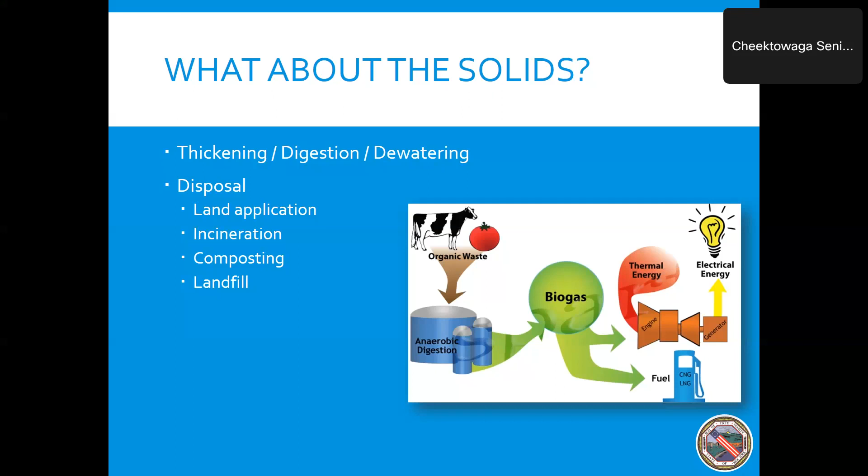So we talked about what and who is a polluter at the beginning of the presentation. Now that you've heard about the history, of course these folks are polluters. No one mentioned Cousin Eddie from National Lampoon's, but you can't be putting that down the storm sewer. No one said sanitary sewer, which I was glad about, even though it was kind of yucky, but we didn't say that the sewers are causing pollution.

What happens to the other one, the stormwater? Stormwater is untreated, generally. If you've ever seen those decals that say 'drains to the river or stream,' that reminds folks not to dump oil in the street, or flick your cigarette butt into the street, because ultimately that's going to make its way into the waterway. Clean up after your dogs, because that will end up draining there too. People don't think about it, right? They're like, let's just throw it on the street, someone will clean it up eventually.

So I want to make sure I give you the right answer. Most of the storm sewers go into the creeks, and then the creeks drain into Lake Erie and make their way there. The City of Buffalo has those combined sewers, so they have the sanitary and the storm going in the same pipe. But if it gets too big of a storm, they have an overflow that'll make its way into there.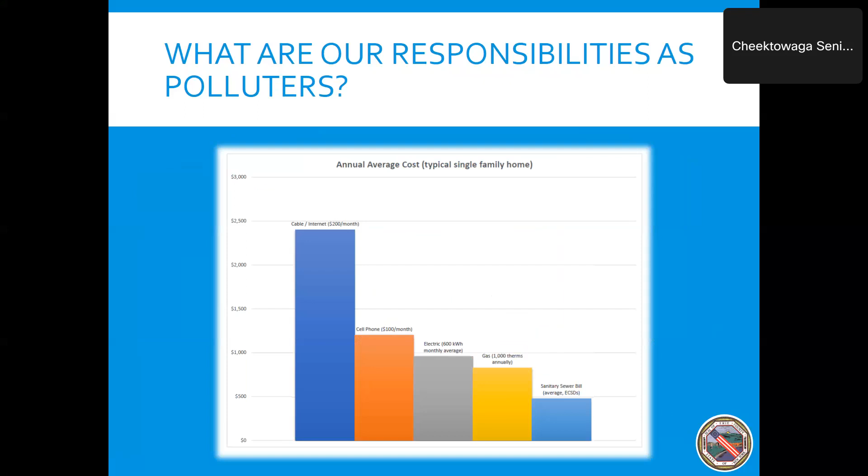So just to bring that up - one of our responsibilities is, you're going to have this on your tax bill if you're hooked up to a public sewer system. No one likes paying taxes - I don't like paying taxes, and I work for the county. But this is an essential service, and it's infrastructure that requires continual upgrading and continual maintenance to make sure that all the benefits are realized.

I think that guy who's doing that shoveling should be getting paid more than a football player. Yeah, well, there you go. Although I do love the Bills.

I've advocated for pay raises for our folks because, during the Christmas blizzard a year and a half ago, we had people stuck at the facilities for 3 days. They complained a little bit, but they knew it was just part of the job, and they knew they were providing a key public function.

So, ask the question at the beginning: what comes to mind when you think of sewers? It was all yucky and gross and things like that. Oh, I hope maybe you think about protecting public health.

Some estimates said life expectancy was around 40 years up until the late 1800s. Some folks have estimated over 50% increase in life expectancy because of sanitation. So if you could take a pill that increased your life by 20 years, would you take it? Would you pay for it? That's what sanitation has done.

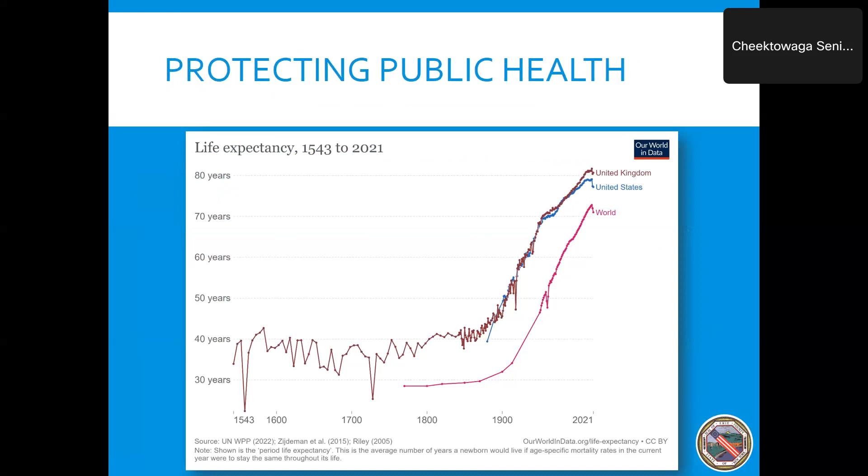So when you think of sewers, hopefully you think about protecting the environment. Buffalo River was lit on fire. Now you go down there around Canal Side, you see boats, tiki huts, river works, the Labatt Blue cans, all sorts of recreation. We kind of gravitate towards water, right? There's something magical about it. It creates money, it creates recreation, all those types of things.

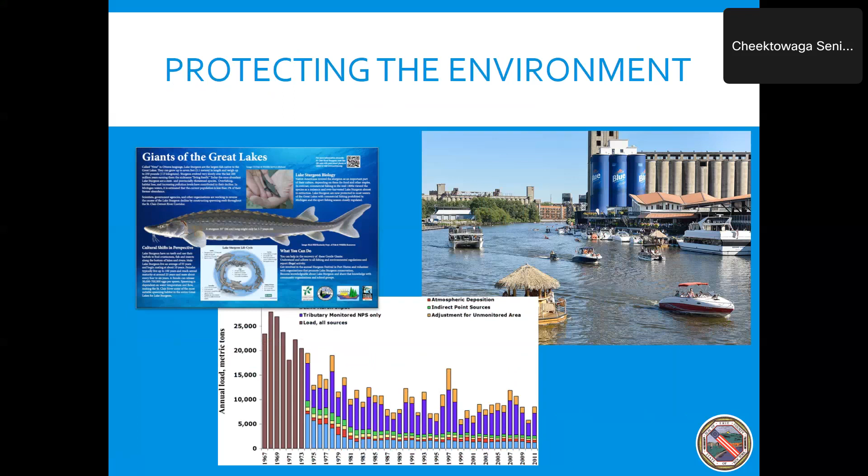The fish, Lake Sturgeon were basically gone in Lake Erie. You're now starting to see sturgeon making a comeback, which are these huge, almost dinosaur-like fish. They're pretty incredible. Chris Hoover called the smallmouth bass fishery locally one of the best in the world. Wasn't that way in 1960, and it's because of the advent of improved sewer systems.

So what does that mean? Well, they actually needed to almost double their workforce. They're a food manufacturer, taking a lot of dairy products and things like that. So you have all the farmers providing that, the truckers bringing it in, the construction work to expand their plant, everything that goes along with that. This couldn't happen without sewers.

In fact, we had a project to build a pumping station along Forest Main just to service their project. We worked with the Erie County Industrial Development Agency to do that. Not a lot of people think about the yuck and everything else that goes along with it, but there are a lot of real benefits that come from it.

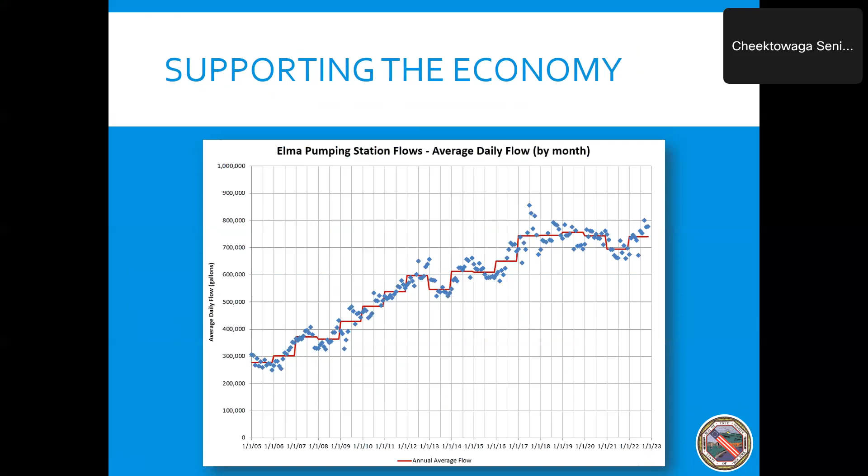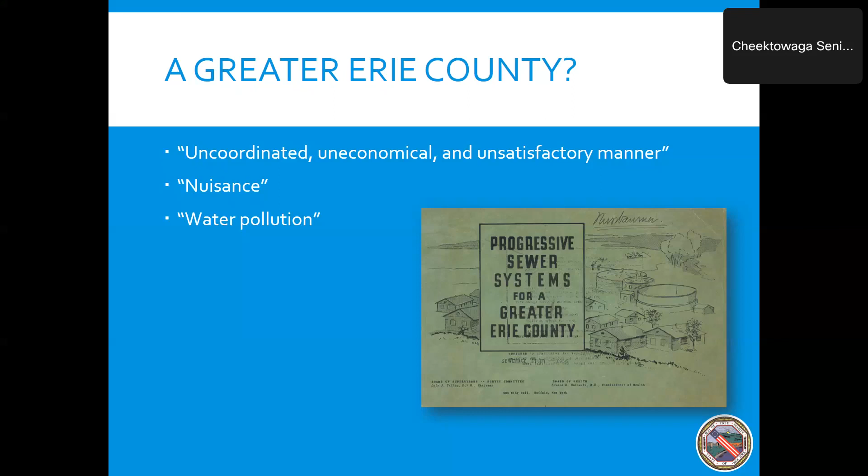No one said, when they thought of sewers, of a greater Erie County. Back in the 1960s, post-World War II, one of the things the Board of Supervisors said was a real problem was that sewer systems were preventing Erie County from being better. It was uncoordinated, uneconomical, unsatisfactory. There were nuisance problems all over the place, and water pollution was prevalent. So a report was put together called Progressive Sewer Systems for a Greater Erie County, because the Board of Supervisors said that if we don't take care of this, we're going to have a lot of problems locally.

So this, I went a little long, but I know there were a lot of questions before. I really appreciate everyone's attention and things like that.